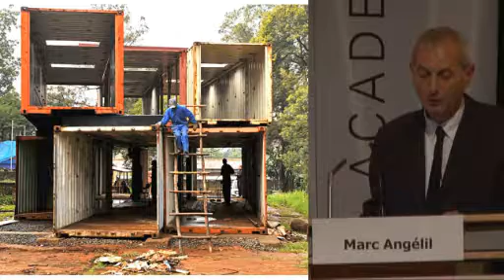It seemed, however, more important to show the work in Addis Ababa in order to promote a discourse on future projections of the city. The problem was that we could not find an appropriate space on campus to exhibit the projects. Thus, we proposed to construct a building using discarded shipping containers to frame the structure of an exhibition building that would be donated to the university.

Containers are, as a matter of fact, used throughout the city as building components, recirculated and recycled within construction for particular purposes. So the structure was erected and the exhibition installed, showing design work done by African and European students in the context of design research studios.

The projects were used as platforms, and this was extremely important to us, for discussions with state officials, local authorities, members of the architectural profession, reinforcing the notion of urban design as a forum for debates on the future of the city.

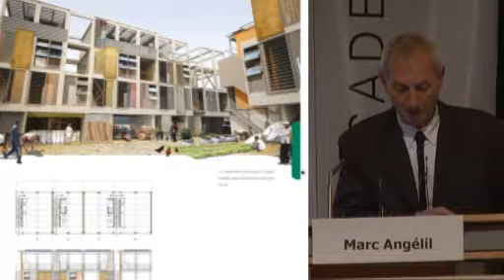Two projects in particular attracted attention. A proposition on the left for a network of towns surrounding Addis Ababa in order to strengthen agricultural communities, a type of semi-urbanization of the countryside, and on the right, a project done by my partner Sarah Graham, a housing project as an alternative to the official grant housing program, using a combination of prefab and self-built construction with the support of micro and small enterprises within the construction sector.

Such propositions need to be made public. In collaboration with our Ethiopian partners, we co-edited a series of issues of the local architectural journal Construction Ahead on urban transformation. And I can guarantee you, everybody within the field read those essays compared to the academic ones that nobody even looked at.

All this ultimately led to the book Cities of Change, Addis Ababa, co-edited by Dirk Hebel, on transformation strategies for territory in Ethiopia, with a focus on urban developments in rural regions as demonstrated in a series of town propositions for strengthening agricultural communities.

The town. Welcome to Bura Nest, the acronym NEST standing for New Ethiopian Sustainable Town.

Under the leadership of Franz Oswald, work on one of the proposed towns had progressed for a site in Bura near Bahir Dar in the Amhara region, in the north of Addis Ababa. Work had progressed with a series of plans for the gradual development of an urban framework that could grow over time. The Nest Town Group was allotted a site on a publicly owned piece of land, a commons near a village that could hardly sustain itself in terms of food production.

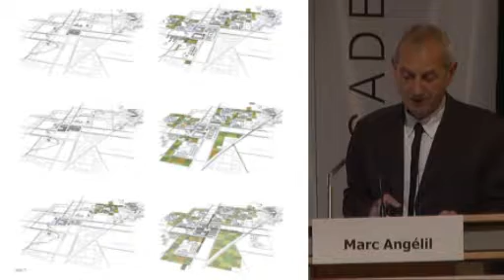The project included a system of water distribution channels for agriculture, a tree nursery, as well as simple shelters equipped with rainwater tanks that you see on the right.

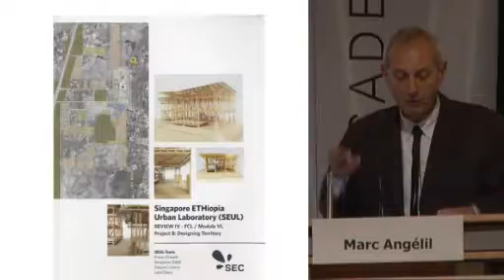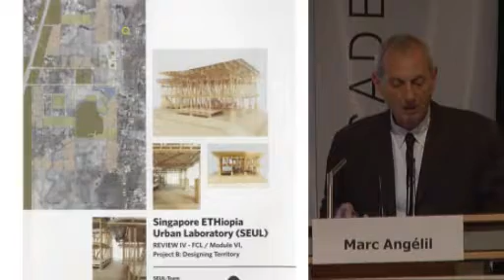The plans, including construction documents and engineering calculations, were further developed at the Future Cities Laboratory in Singapore, which offered us the financial resources to pursue the project within the framework of the SEUL Workshop, SEUL being the acronym for Singapore Ethiopian Urban Laboratory, organized by Franz Oswald and involving a group of young scientists from a series of disciplines.

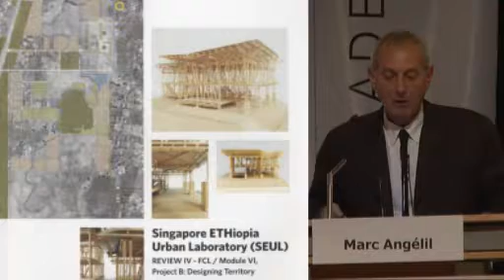Our collaboration on site, a young Swiss and an Ethiopian architect, are working in tandem, in situ, to organize the construction process and secure communication with local authorities.

The town was inaugurated in an official ceremony with community representatives and members of the Nest Town Group, including Dieter Läpple, who talked this morning, in the summer of 2010, with the laying of a foundation stone and an endless number of endless speeches. But somehow things went wrong.

A few weeks later, the small monument was destroyed, as local stakeholders believed that our project was nothing other than a ruse to land grab publicly owned land for industrial agriculture. Basically, we had relied on communication with public representatives and neglected to directly involve an important group of local farmers.

So in order to remedy the situation, a public meeting was organized with the support of the local priest, acting as translator and mediator. A digital projector was installed, powered by a car battery, and drawings were projected on the wall. The team was given the opportunity to explain the undertaking's objectives.

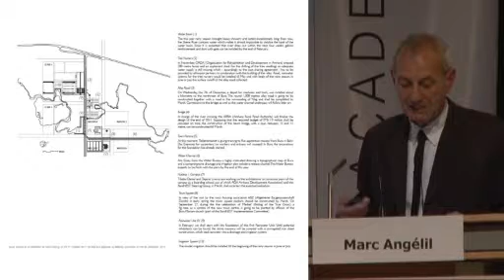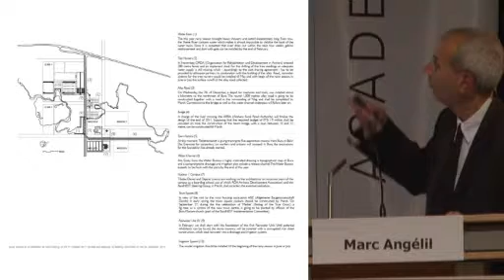We basically received feedback from the community, and a new plan was drawn showing the key components of the project: the water basin, the tree nursery, the roads, the bridge, the town factory, etc.

The plan was submitted to the town council for approval, leading to another public meeting under the fig tree, followed by a referendum that took place in the fall of 2011. This is democracy in action. The community unanimously endorsed the project.

And with this, construction could begin, first of an access road leading to the site and connecting the new neighborhood with the existing village, followed by the building of a water catchment basin and dam.

The most recent development of this venture involves the strengthening of communal ties. A delegation from a Swiss housing cooperative visited the site a few months ago to establish a dialogue with Ethiopian cooperatives, such as the Cooperative Promotion Agency of the Amhara region, which shared its philosophy of promoting the empowerment of stakeholders through the formation of formal collective entities, whether in the form of agricultural, housing, or water cooperatives.